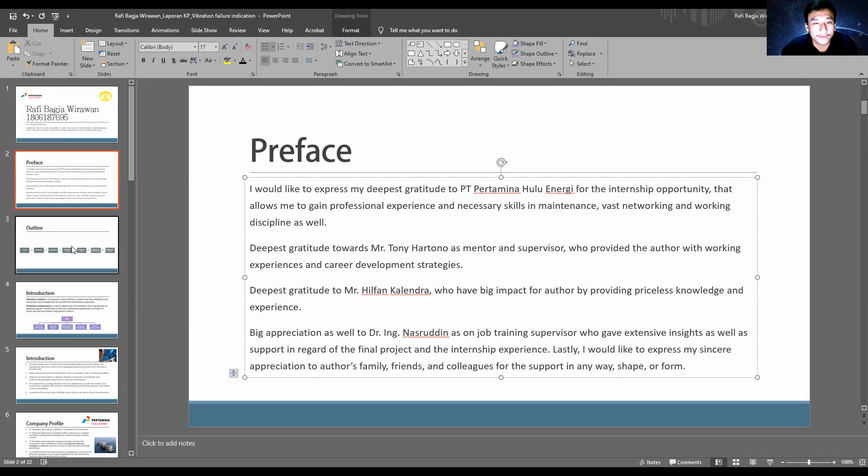This presentation has several outlines I want to point out, from the fundamental theories to the conclusion and recommendations. We've already proceeded from the preface, and this is the outline. We're going to go through the introduction, company profile, and the attachment or KP assignment, the kerja praktek assignment.

The introduction is heavily based on the vibration method, which is used to determine the reliability of equipment and is categorized as a predictive maintenance approach. What is predictive maintenance approach? It is used to determine the condition of equipment. This is basically what condition-based maintenance means: determining the condition of equipment by applying regular or scheduled monitoring, so that any replacement and plan of action can be done before the equipment fails.

This is the most commonly used PDM approach in industry. Pertamina Hulu Energi uses two types of predictive maintenance approach as far as I know: vibration monitoring and lube oil analysis. They also implement pressure monitoring as a form of PDM approach.

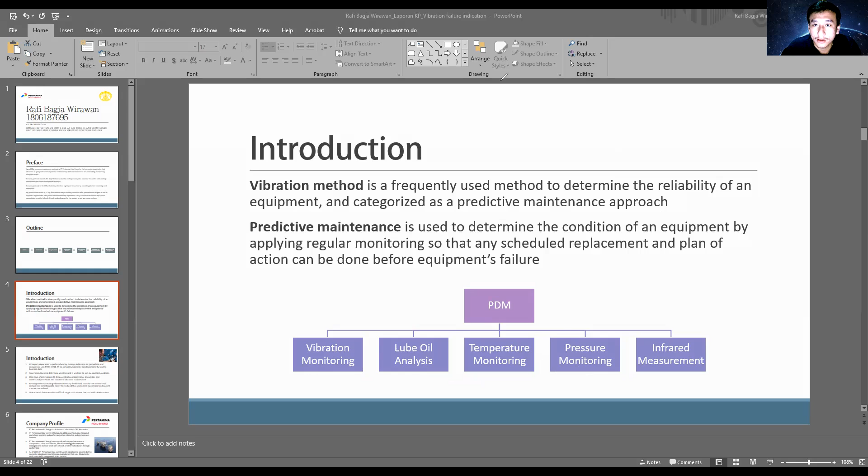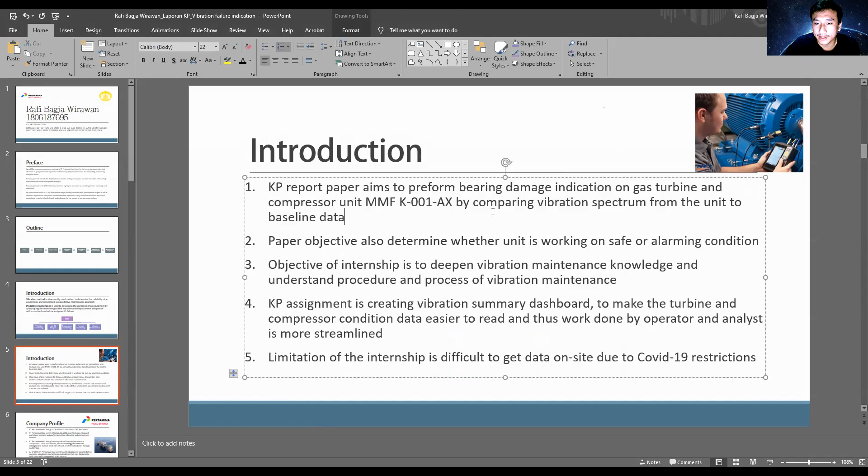This paper aims to perform bearing damage indication on the gas turbine and compressor unit MMF K-001-AX by comparing vibration spectrum from the unit to baseline data. We will get to this a little bit later on.

This paper also determines whether the unit is in a safe condition, an alarming condition, or has to be shut down. The objective of the internship in general is to deepen my vibration maintenance knowledge and understand the procedure and process of vibration maintenance.

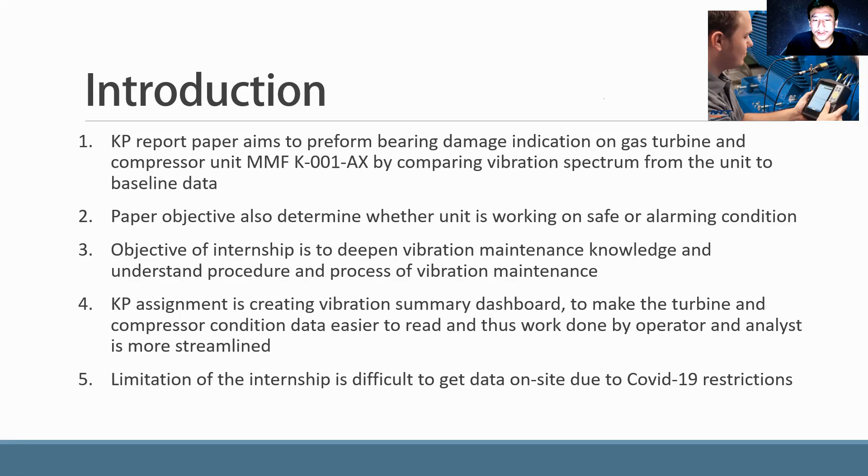And lastly is the limitation: it was difficult to get hands-on data on site because of COVID-19 restrictions. So I would like to apologize deeply if there is any grammatical error or unsatisfactory result in my paper.

Pertamina Hulu Energi is a BUMN, a subsidiary company of PT Pertamina. PT Pertamina Hulu Energi, usually called PHE, was founded in 2002, and since then has run and managed a portfolio, assisting and performing other related oil and gas business and services.

The company has a special and unique characteristic compared to other Pertamina subsidiaries, which is running joint ventures or partnerships, and then managing and overseeing work sites of other subsidiaries through partnership. So they have this unique characteristic, and they also have an impact, so to say, on other Pertamina subsidiaries.

As of 2019, PT Pertamina Hulu Energi has 58 subsidiaries, consisting of 53 domestic subsidiaries and 5 foreign subsidiaries. Pertamina Hulu Energi also runs 48 domestic worksites and 2 foreign worksites.

This is basically the chapter to discuss vibration and vibration maintenance. Maintenance and monitoring is a crucial part of any industry, because if done correctly, this could save us tons of money and improve the productivity of a company. Several methods have been used and improved throughout the years as the industry evolved.

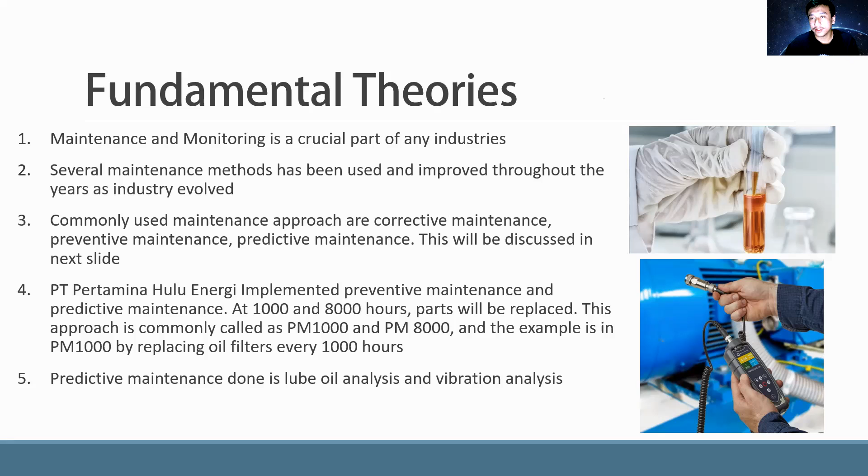PM1000 is replacing oil filters every 1,000 hours, or about 2 months. PDM done in PHE is lube oil analysis and vibration analysis. They also implemented pressure analysis. This is the example of maintenance standard at PT PHE.

This is split into 2, basically the PDM and the preventive maintenance. We can see that the first 2 examples are PM, or what they call planned preventive maintenance, and the second one is the CBM or the PDM.

For the PM8000, it is scheduled at 8,000 hours, and for the PM1000, it is scheduled at 1,000 hours. So what they do at PM1000 hour and PM8000 hour is, for example, minor repair for supporting systems or equipment, and some calibration needed for the instrument. As the same example before, they replace oil and fuel filters.

Vibration surveillance and oil analysis is a form of predictive maintenance, and for Pertamina they've done it every 1,500 hours. This depends on the condition and the situation. There is some example that follows a 4-month schedule annually, so 3 times a year, and there's also an example every 1,500 hours. They also dismantle, overhaul, and reinstall the bearing as a form of PDM by doing vibration analysis.

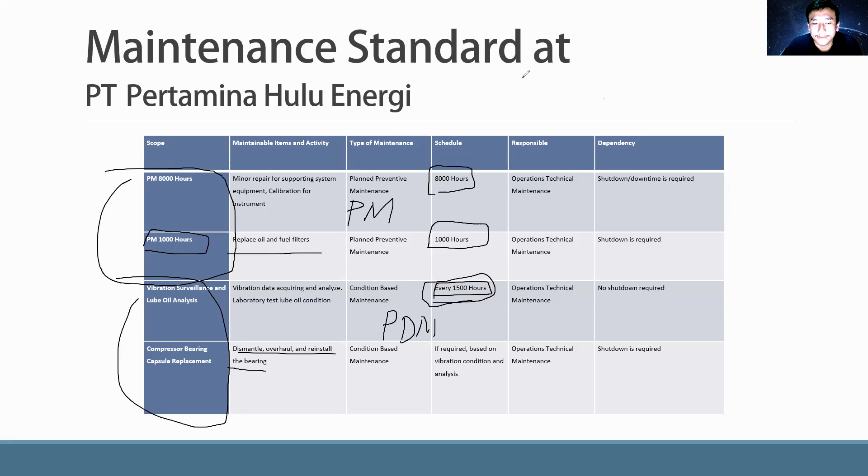I would like to discuss more about maintenance types. There are 3 types that I'm going to split into, which is corrective, preventive, and PDM or predictive. Corrective is a form of maintenance that replaces the equipment after it breaks down. This actually has higher unplanned downtime since we don't really know when the equipment will need to be shut down.

Of course, there's no analysis. They're just going to have activities that will replace the equipment. So at first, upfront, it will be cheap compared to other maintenance types. But it will be more expensive in the long run since there will be higher unplanned downtime.

Because at every minute, the cost and the revenue, so to say, can be quite a lot if not done properly. And then there is preventive maintenance.

This is the scheduled replacement of parts, usually rated at working hours, like PM8000, PM1000. They'll be replacing the equipment for every PM8000 or PM1000 hours that is listed. There will be lesser unplanned downtime, but increased planned downtime.

So there will be a higher need for spare parts, and parts that are still in good condition might get replaced as well. This is one of the downsides of preventive maintenance, since there will probably be a part that is still in good condition, but it's going to be replaced as well.

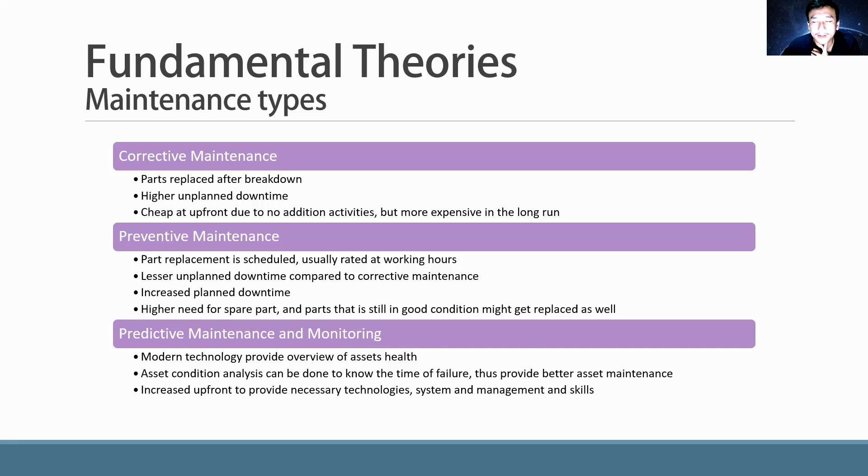An increased upfront cost is the downside, because they have to implement the necessary technologies, the system, and the management and skills. I'd say predictive maintenance is one of the best ways to approach maintenance and monitoring of equipment in any industry.

Time domain can be converted into frequency domain using FFT. However, time domain isn't necessarily accurate if you want to know the exact sections of the equipment being assessed. So we have to change it into frequency domain using FFT, which gives the vibration amplitude and frequency data. This will show the exact section of the equipment being assessed, like which one is the abnormality and which one is in good condition, based on the spectrum.

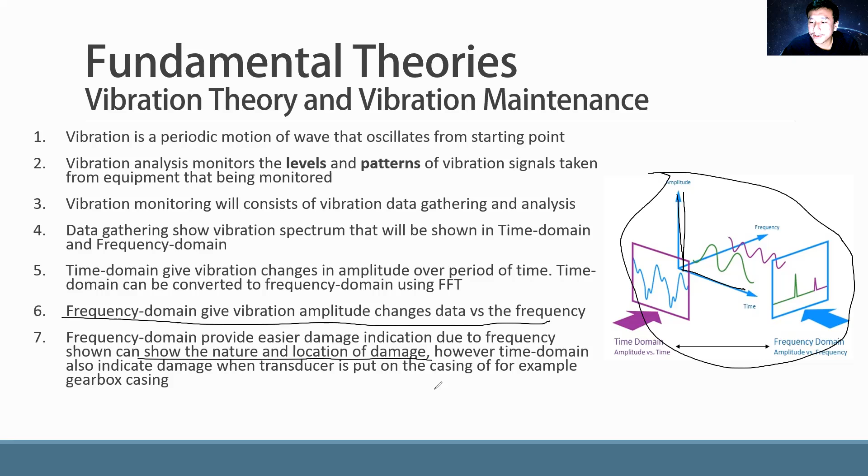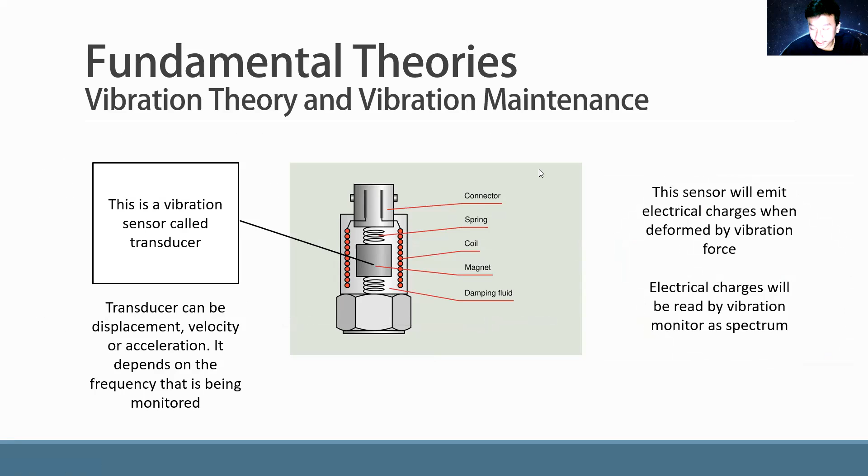This is the transducer, the sensor that is going to collect vibration data. Once it is deformed by the vibration forces, it will emit electrical charges. These electrical charges will be read through the vibration monitor as a data spectrum, just like in the time domain and frequency domain discussed earlier. This is the equipment or system that is going to be studied.

This is the gas turbine compressor by Solar Centaur, model 40T4702, and the compressor is the big one, the circle one, with unit Solar C505. All of this in Pertamina is called the MMF K001AX. The system consists of an engine that continuously draws a stream of gas, a turbine that mechanically runs the compressor, and the compressor that serves to increase the pressure of the continuous gas stream.

This is the exhaust, and some of this will go here. The compressed gas will be used as a way to take the oils from the injection out.

Velocity transducer is placed with BNC cable on BNC port in these red locations. Let me clear that up. In these red locations here, the location is called the gas producer section and the power turbine section. It will be accessed via the BNC port and BNC cable.

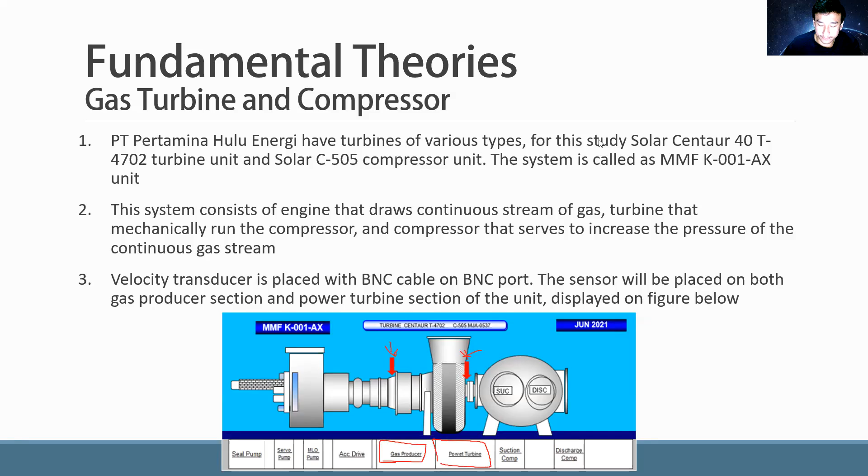This is the methodology for this study. First, we are going to have a literature study, heavily based on Cahyono et al. findings from ITS. Then we are going to collect data which have been collected by the operator at June 2021.

Then the spectrum that has been collected will be analyzed and compared to the baseline spectrum data. If it's suitable with the baseline spectrum, we proceed. If it's not, then we can always reanalyze and reprocess the spectrum data.

After it's suitable, we're going to go through determining the safe limit. This is basically comparing the vibration data from the worksheet to the baseline data from the manufacturer. It will be discussed further in the next slides. And then determine the possible failure taken from the spectrum data.

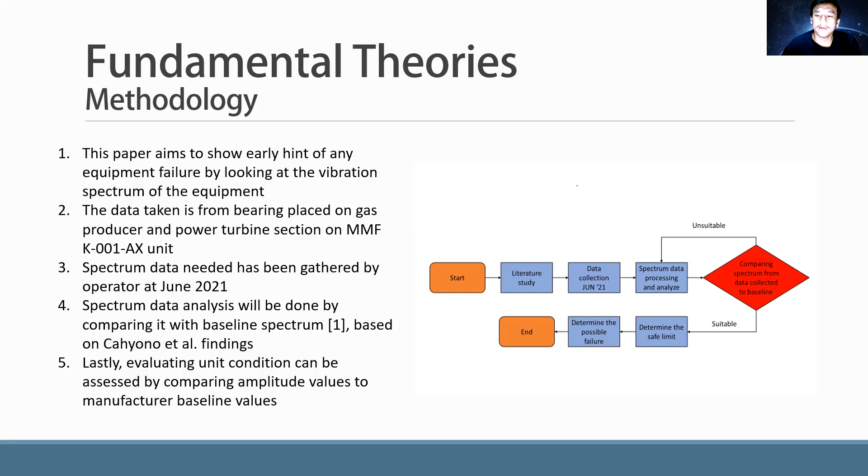This is the baseline for the spectrum data, which is heavily based on Cahyono et al. findings. Every spectrum data has its own characteristics, and it will be compared with the data that is provided by the operator from PT Pertamina Hulu Energi.

So this is the analysis for the study case. The study case detects any damage occurring on bearings in the gas producer and power turbine sections. Looking at the spectrum vibration data for the gas producer section, done before PM 8000, it shows there is 1x and 2x dominant order, and some harmonics from 3 to 9. This might indicate that the bearing on the gas producer section has misalignment occurring.

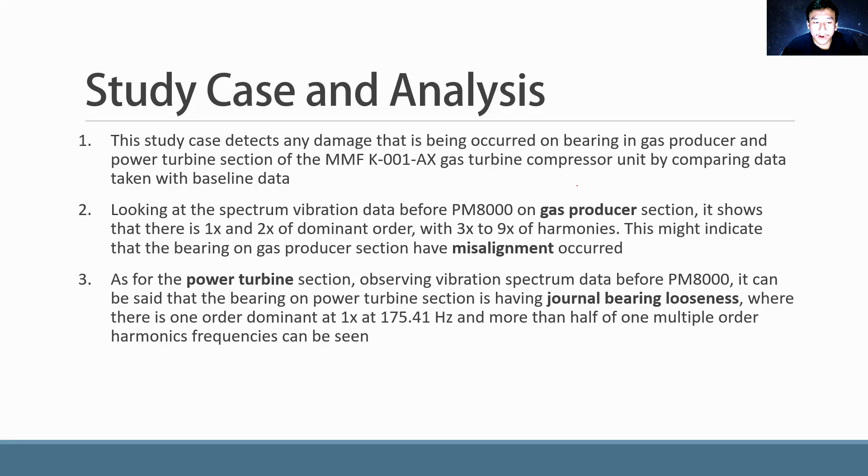As for the power turbine section, observing the vibration spectrum from before PM 8000, it can be said that the bearing on the power turbine section is having journal bearing looseness, where there is one dominant order at 175.41 Hz and more than half of the 175.41 Hz of one multiple order, or more harmonic frequencies.

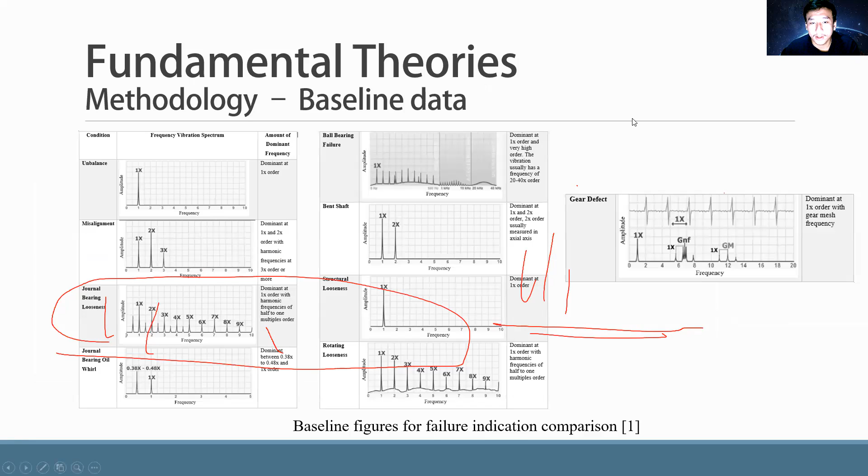There is a dominancy at 1x and 2x order with harmonic frequencies at 3x order or more. From the baseline data, this indicates there is a misalignment on the bearing.

For the second data is the power turbine section. This is a bit hard to analyze since it doesn't really match with anything, but the harmonics resemble one of those in journal bearing looseness, since there is about 1x dominancy, and all of them have harmonics that resemble half to 1x multiples order, as we can see from this data below.

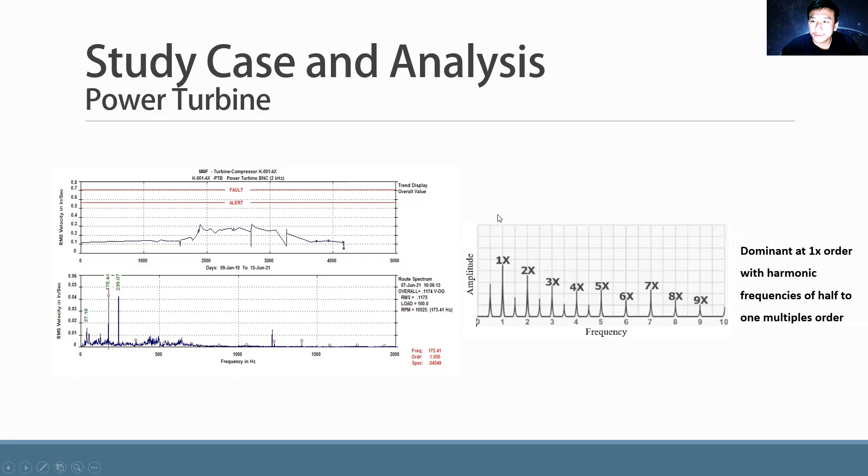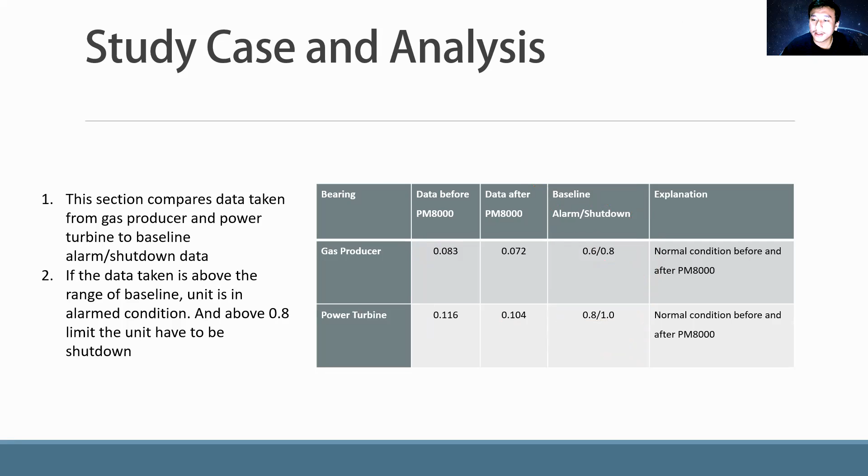So even before the PM 8000, the data can prove that the unit is still in good condition. This is the conclusion and recommendation for PT Pertamina.

The unit MMFK001AX can be operated in normal condition since it is below alarm and shutdown limit.

From the vibration data provided, there is no indication of damage and abnormalities on the unit, since the magnitude is way lower when comparing data before PM 8000 and after PM 8000 with the baseline data. So the unit is working in safe condition.

Bearing damage indicated on gas producer section or GP might be misalignment, and on power turbine might be journal bearing looseness.

However, in-depth analysis can be done to ensure the condition of the bearings and the unit. The recommendation is that performing comparison between spectrum vibration from PT Pertamina, the gathered data, and the baseline figures before on the table, can be beneficial for the company to see any damage indication on bearings. This might provide the easiest method to determine which damage on bearings might be happening on the unit.

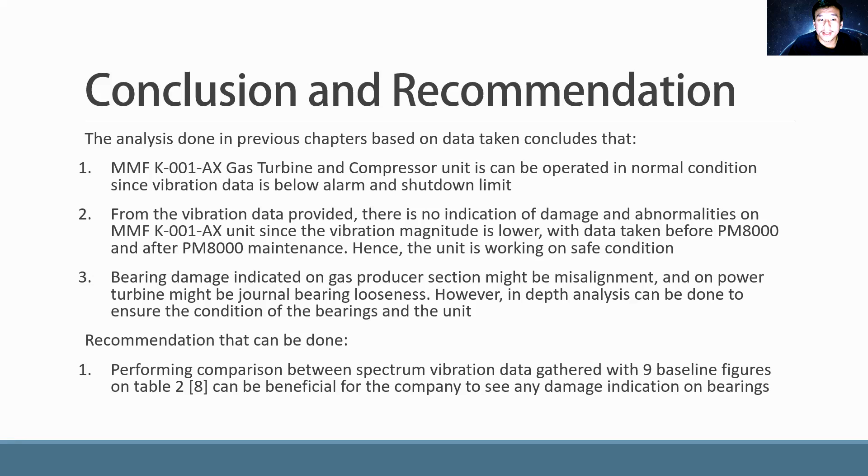The reference is by Benny Cahyono, Vibration Spectrum Analysis for Indicating Damage on Turbine and Steam Generator on Amurang Unit 1.

This is an attachment giving another visualization of what I did and Arsalan did in PT Pertamina.

So me and my peer Arsalan were assigned at PT Pertamina Hulu Energi with an assignment given by my mentor, Mr. Tony, which is a vibration data summary dashboard. This dashboard is a visualization for the operator and staff regarding the division of time and manpower.

So what is the background for this? Prior to creating the dashboard, the problem is that the operator and the worker have different ideas about the condition of the units, or different units other than MMFK001X, 001AX, in all these stations actually.

This will provide them easier access to data so they can know when is when and who is who that is assigned on all these stations.

Before making the dashboard summary, we have to study the data and create the dashboard concept. The information consisted of manpower, various turbine compressor status model, MTTF, MTBF, any defect occurred on the unit, vibration level data, and recommendation.

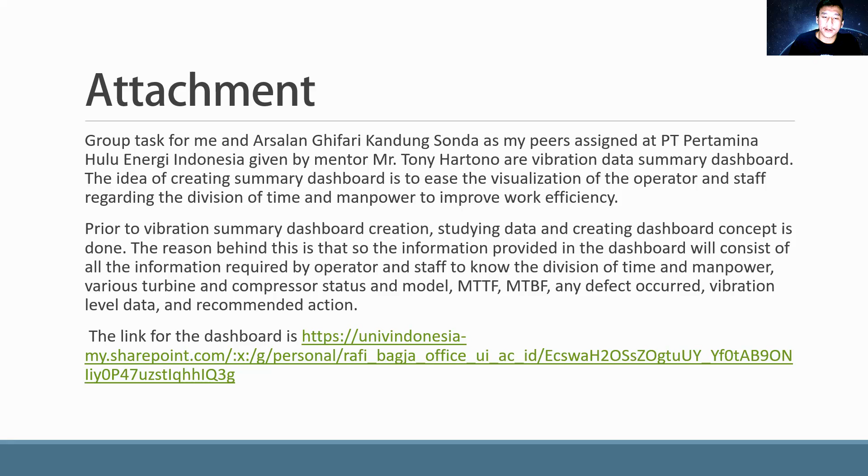We provided the link for the dashboard. I hope that with this vibration summary dashboard creation, it will provide all the necessary information required by operator and staff to know the division of time and manpower and all other information that is going to be needed. This is the dashboard creation.

The model from Pertamina, the model from Solar, which is the manufacturer of the turbine, and the status, the schedule of when is the last time there has been maintenance for the turbines, the type of maintenance that is done on the turbines, and also the vibration level.

This is one of the most important data from the summary dashboard, and also the defect that might happen.